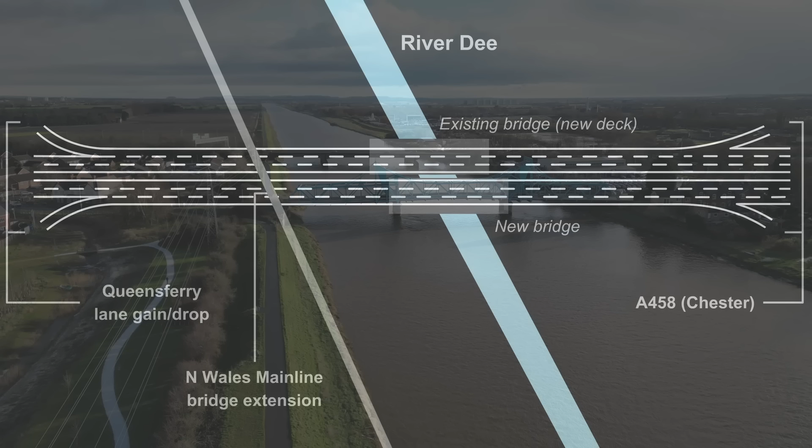But what has this got to do with the replacement of the bridge over the River Dee? Well, the first proposal for its replacement had the potential, in a small way, to improve the situation by providing 3 lanes from the A458 junction to the Queensferry junction. This, in my opinion, would, at the very least, have provided some separation between long distance and local traffic.

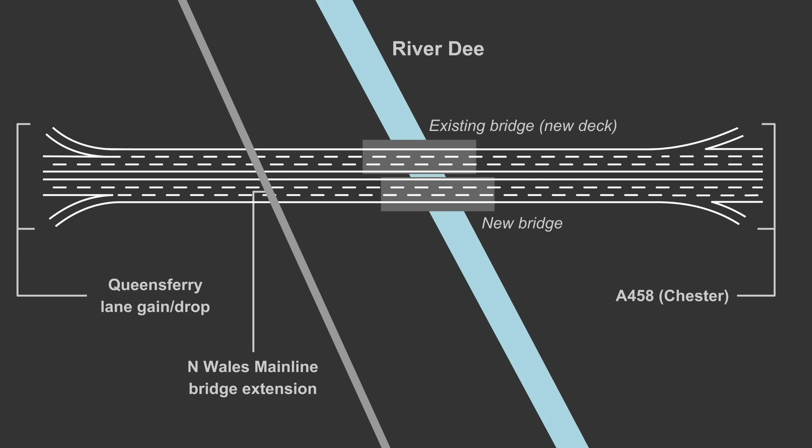In theory, people travelling from the Wirral or Chester to Queensferry and Sandycroft would, in effect, have their own lane from the A458 to the Queensferry turnoff, and vice versa for traffic heading the other way. This proposal should have gotten around the No New Roads Directive, as it was technically a renewal.

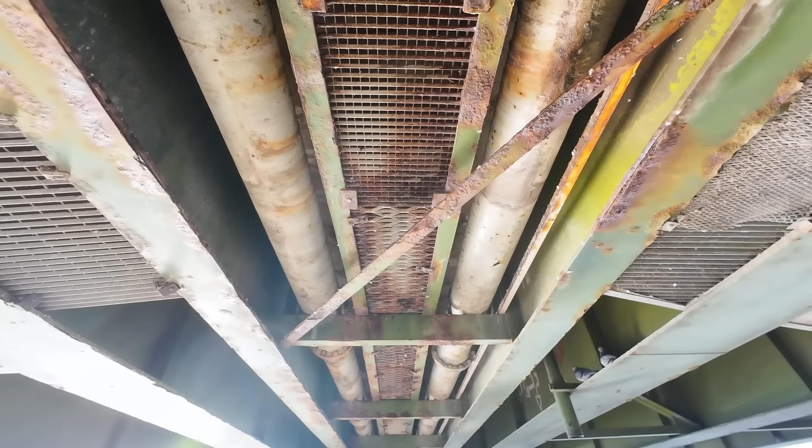The deck of the existing 4-lane bridge is in a poor state, and has reached the point where it would no longer be economical to repair. Such is the scale of the work, repairing the deck would likely have required multiple lane closures for several years. Doing nothing at all would likely mean that speed and weight restrictions would have to be applied in future, followed by permanent lane closures and the eventual full closure of the bridge.

As the A494 forms the main link from North West England to North Wales, carrying upwards of 70,000 vehicles a day, closure is simply not an option.

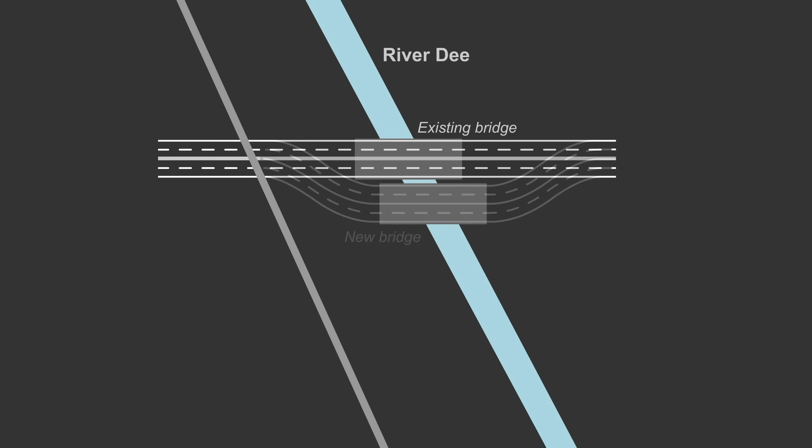It was therefore proposed that a new bridge should be constructed offline, next to the existing bridge. Once complete, the old bridge would be closed while a new deck was installed, then reopen for eastbound traffic, with the new bridge used for westbound traffic. This would have provided 3 lanes in each direction.

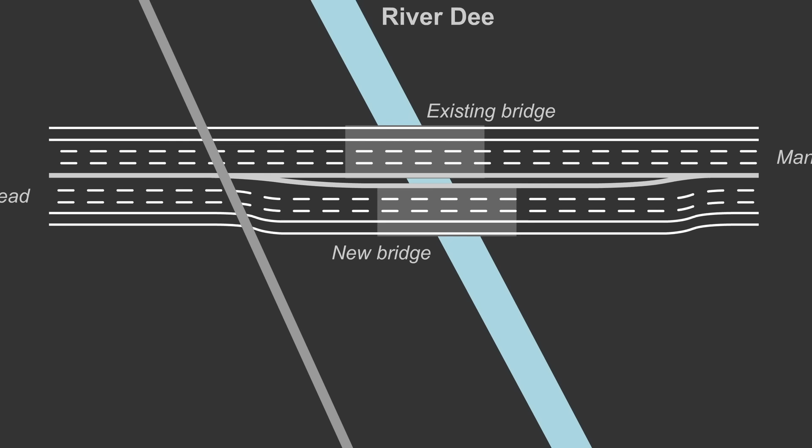However, this plan was also rejected, it seems due to environmental concerns. But it's also equally likely that it was down to the cost.

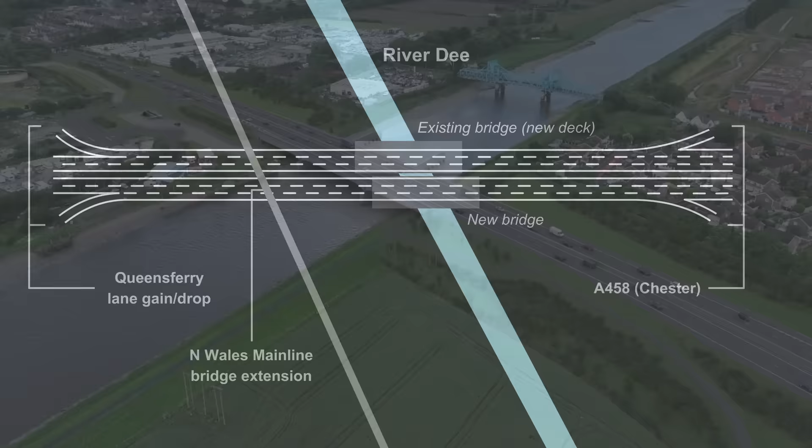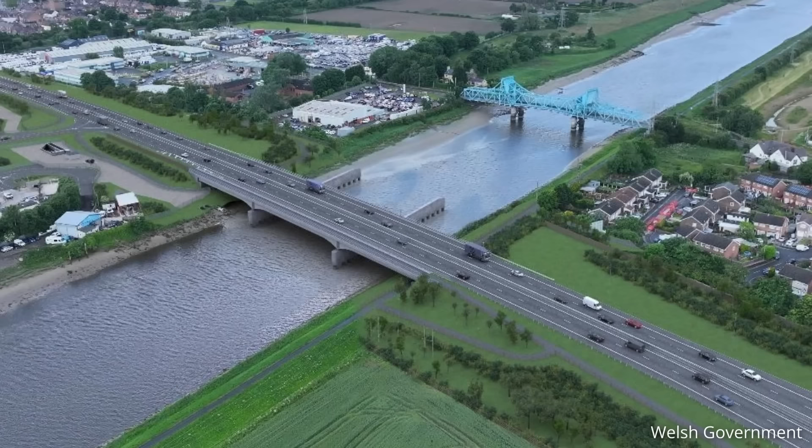This leaves us with the most recent proposal, approval for which has just been announced. Despite being a much needed bridge replacement, the scheme has had to go through the normal public consultation phase and value for money assessment, which has taken several years to complete.

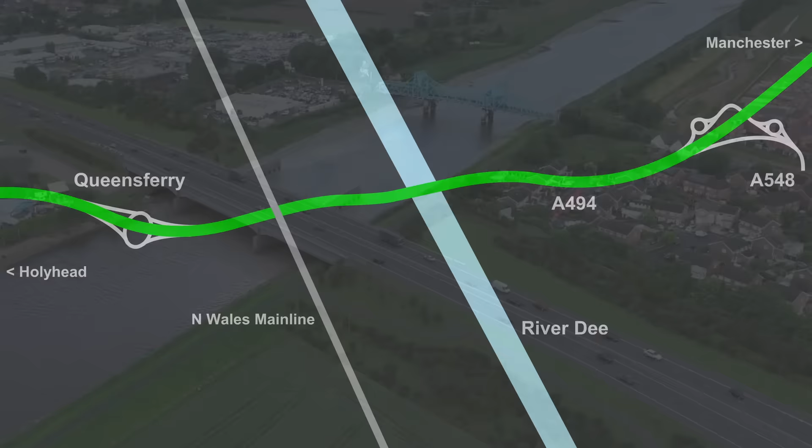The latest proposal will see the existing bridge replaced entirely with a new structure, which will have only 2 running lanes in each direction, as well as hard shoulders and a shared cycle and pedestrian path. This bridge will be assembled offline to the southeast, or upstream, of the existing bridge.

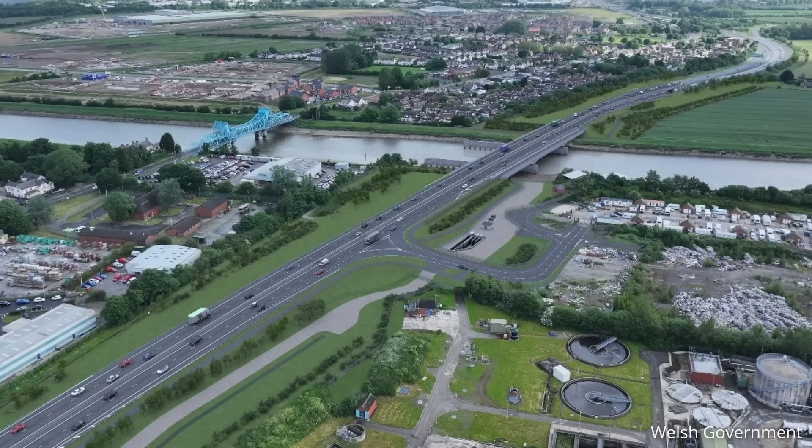This revised scheme, which is smaller in scale, has a projected cost of between £150 and £200 million, which sounds like a lot, but it's about the going rate for a major bridge replacement these days.

Frustratingly, the reduced scope means that the pinch points will remain and congestion will not be eased. The Welsh Government does, however, argue it's improving active travel links with the new shared path, but it's unlikely to have a meaningful impact on traffic volumes given that much of the traffic is long distance.

The scheme is, however, being taken forward, with work expected to begin at the end of this year or in early 2027. It will then take between 2 and 3 years to complete the project.

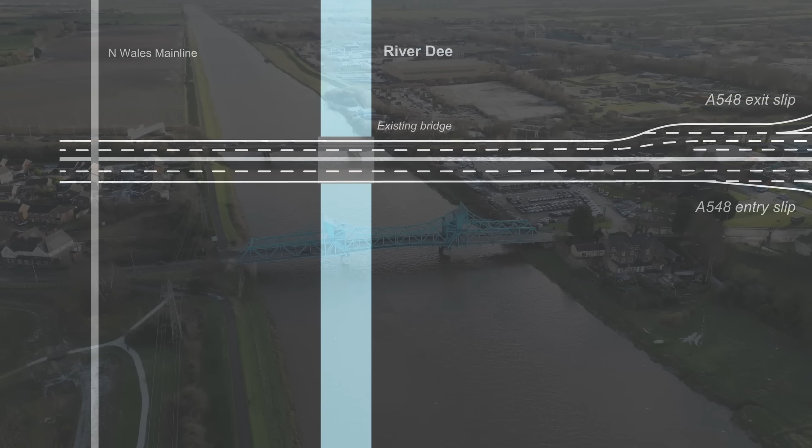As the new bridge is being built offline, the disruption will be reduced during construction. There may be speed restrictions and lane closures on occasion, but the existing bridge should be able to remain largely open throughout the construction of the new bridge.

Significant full road or lane closures should only be required during the realignment of the existing carriageway over the new bridge. Once the road has been diverted over the new bridge, the existing structure will be removed.

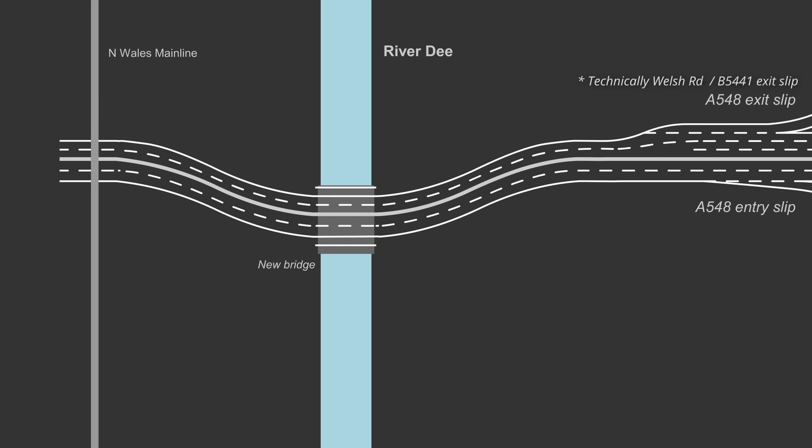Although there will only be 2 lanes in each direction to begin with, there has been suggestion that the new hard shoulders could be converted into live lanes in future. The exact wording within the report states reallocation of road space, which I've taken to mean possible hard shoulder running. However, I may be wrong. I'm also not sure why provision for future reallocation is being included when capacity is already constrained.

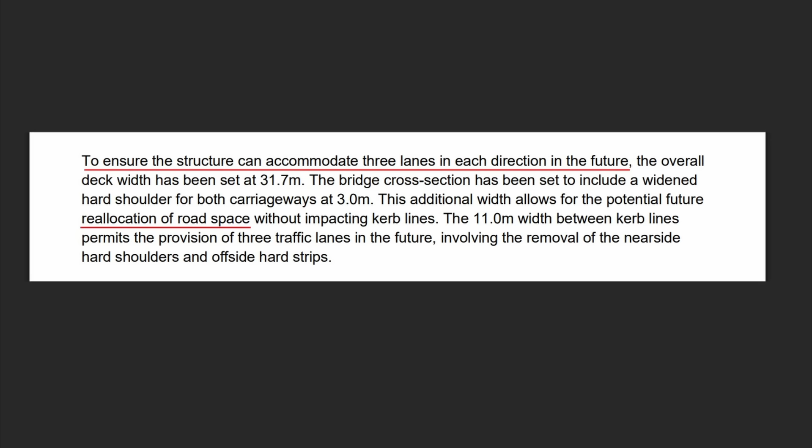It's almost certain that the scheme will go ahead, although there will be a 6-week window within which the plans could be challenged at the High Court. However, this seems unlikely, as previous outstanding disputes over the compulsory purchase of land have been settled.

If all goes to plan, the new bridge should open to traffic by 2029. There is one final twist in the saga, which is that the Welsh Government are once again looking at plans to build the so-called Red Route. But I am sceptical that this scheme will ever be taken forward.